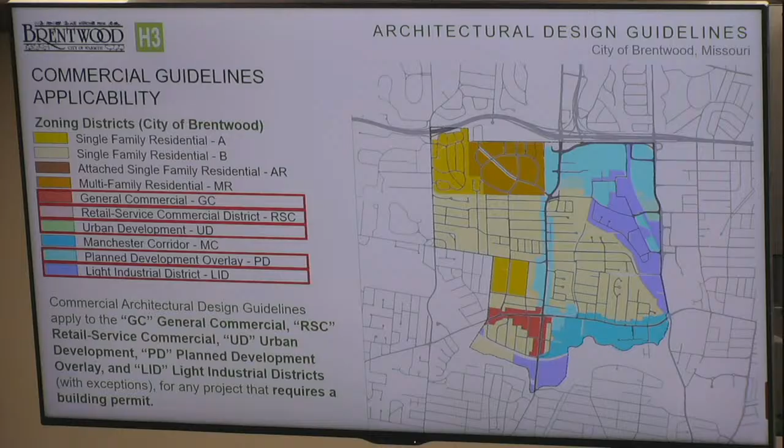One of the things, in addition to the guidelines themselves, the document that's up for adoption as an addendum to the comp plan does include recommendations for updates to Brentwood's zoning code in the commercial districts. Of course, those zoning code updates would not go into effect with adoption of this as an amendment to the comp plan, but one of the major objectives of the zoning code updates is to address some issues related to building siting and parking requirements, particularly on small lots and particularly along Brentwood Boulevard.

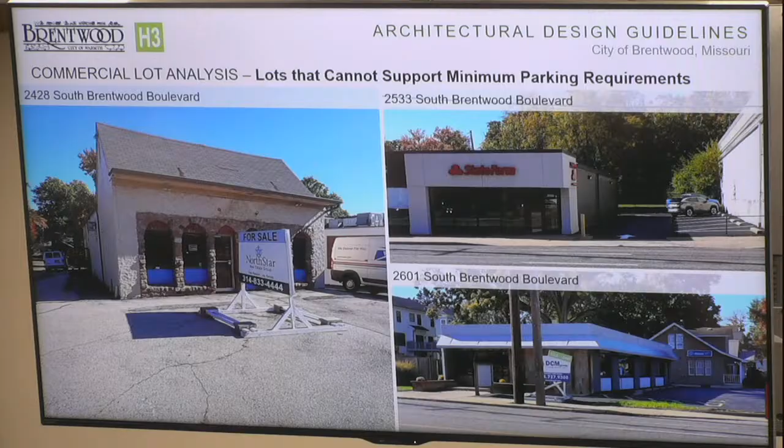These are three examples of properties that have largely been rendered unimprovable because of the requirements to comply with the zoning code's current parking requirements. And so we have made recommendations to help overcome that issue, which I'll get to in a moment.

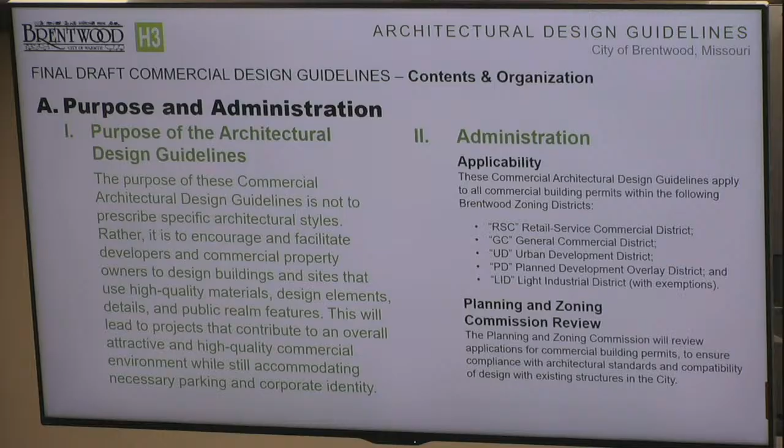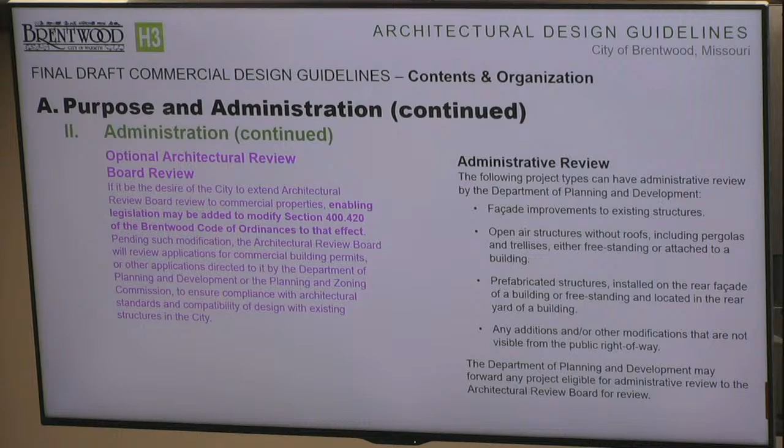So contents and organization: we start off with purpose and administration. Again, this explains the applicability, the Planning and Zoning Commission review. We have added language for optional architectural review board review, should the city wish to put commercial developments into the purview of the ARB, and then also conditions for administrative review that are similar to what you all adopted as part of the residential design guidelines last year.

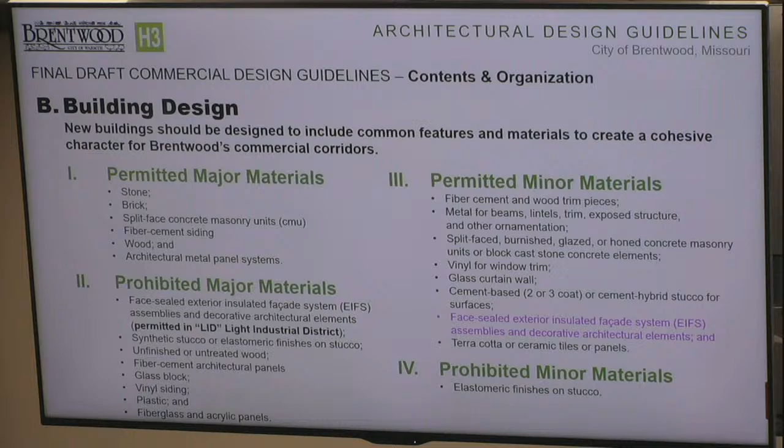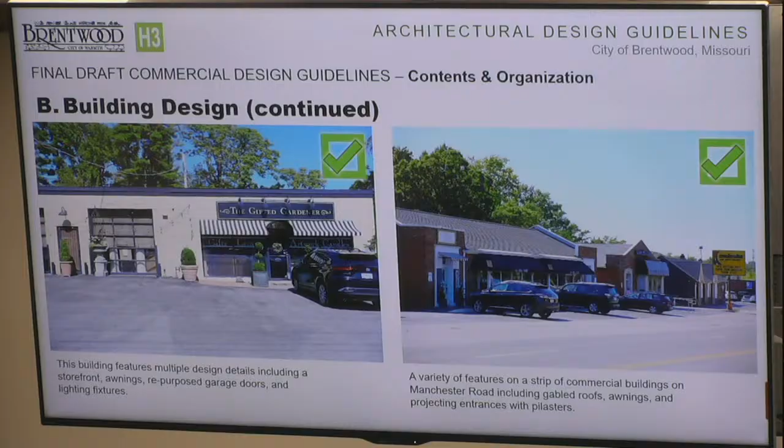Then the design guidelines go through a variety of topics related to building design. That includes materials. I will point out one change that was made based on feedback from this board: moving face-sealed exterior insulated facade system assemblies from prohibited major materials to permitted minor materials, so you see that highlighted there in magenta. Then sections on building details, design features and structures, building entrances, with some examples of good practices in Brentwood today of incorporating those features. Facade articulation, building roofline, again, some examples of those.

Bicycle and pedestrian access guidelines for windows and doors.

The doors section is another section that was updated based on feedback from our public open house. It basically states that while retail storefronts are required to have clear glass doors, other commercial storefronts including offices, service businesses, and eating and dining establishments can also use solid doors of wood or metal of a design that's complementary to the building and approved by the Planning and Zoning Commission. So this allows for some additional flexibility in non-retail storefronts.

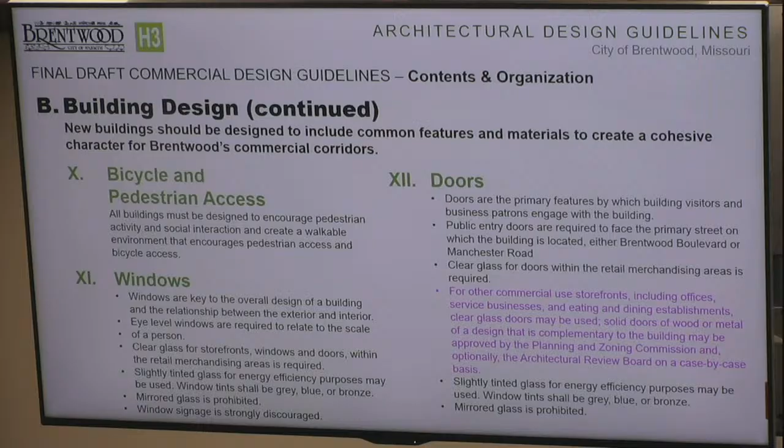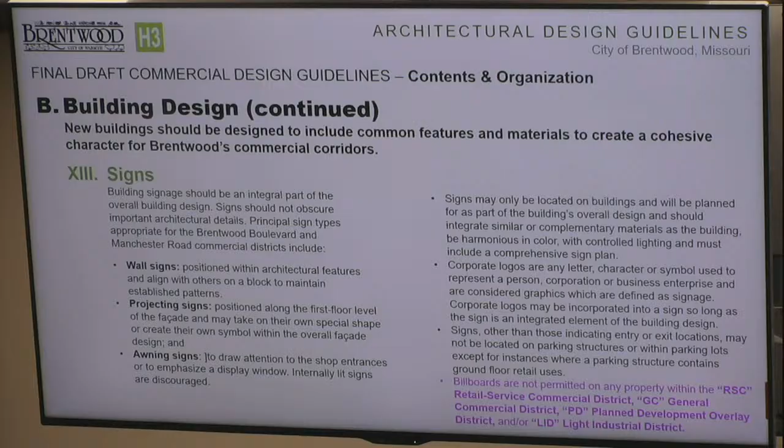Then signage guidelines. One addition here, again from feedback we received at the public open house, was to prohibit billboards within the RSC, GC, PD, and LID districts. This basically brings those districts in conformance with the prohibition of billboards in the Manchester Corridor MC district. Again, some examples of good signage and how it can be integrated into building design.

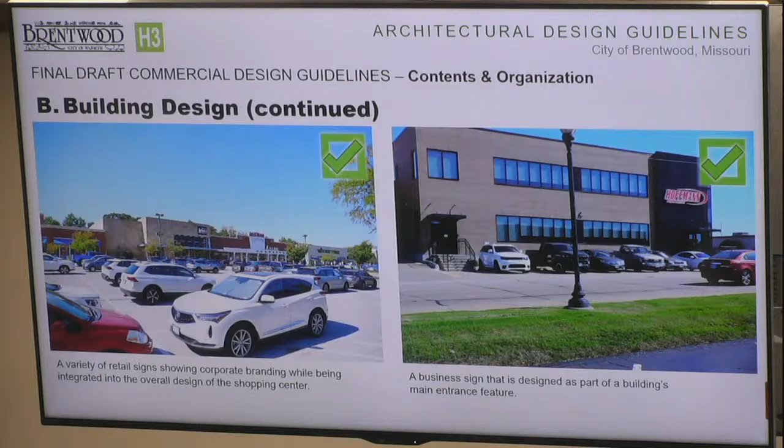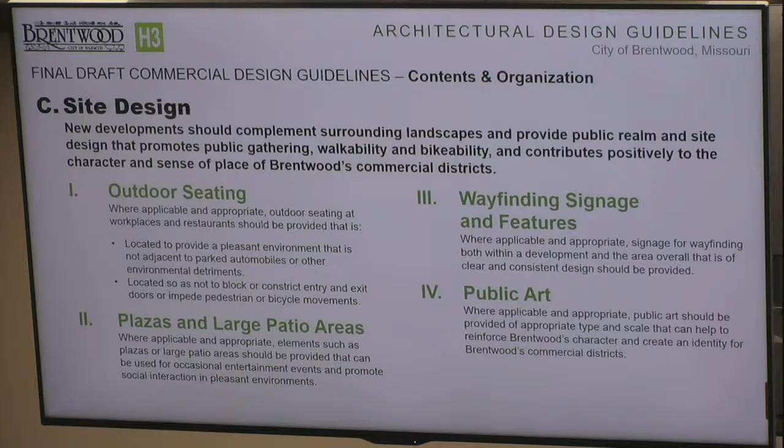Then the third section, Section C, deals with site design. So guidelines for outdoor seating, provision of plazas and large patio areas, wayfinding signage and features, and public art. And some examples of site design.

Again, although we've talked about this in the past, I'll draw your attention to the image on the right, which is storefronts along Clayton Road in Clayton. That is, from back of sidewalk to front of facade, a 20-foot setback. So keep that in mind when we get to the zoning update recommendations.

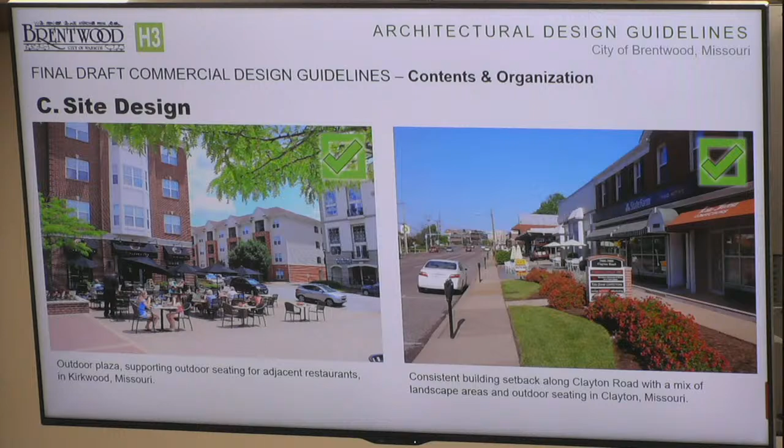Then continuing on with site design, recommendations for building placement. Again, this section was updated. There was language removed from the third bullet point to basically allow for some additional flexibility. It now states that buildings on corner lots should include a prominent architectural feature or emphasis at the corner. Previously it stated a greater height than the rest of the roof, but that was felt to be too restrictive in terms of prescribing design solutions, so that was removed.

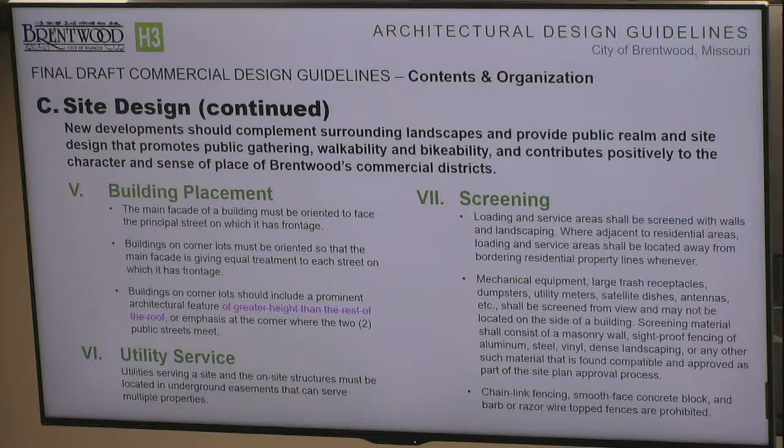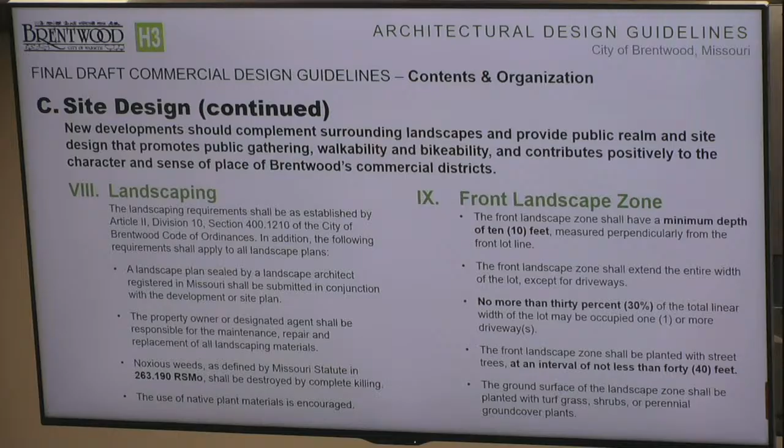And then guidelines on landscaping, which the full guidelines include permitted tree species based on what is in other portions of the city's code of ordinances, requirements for a front landscape zone. Here you can see examples of, on the left, really no front landscaping to speak of, versus on the right, a front landscape zone on a new project.

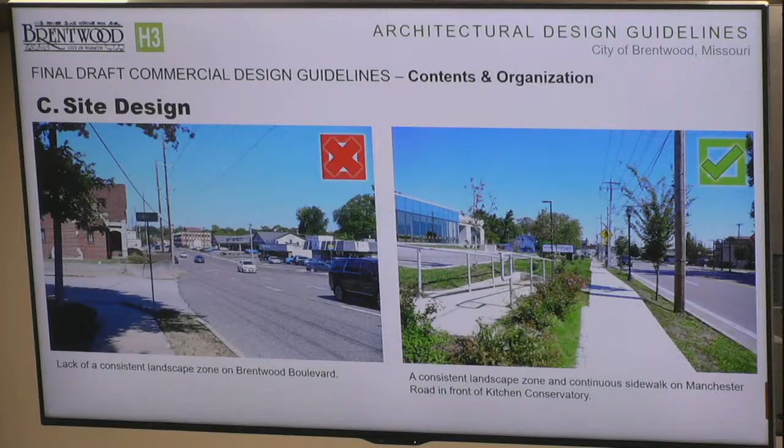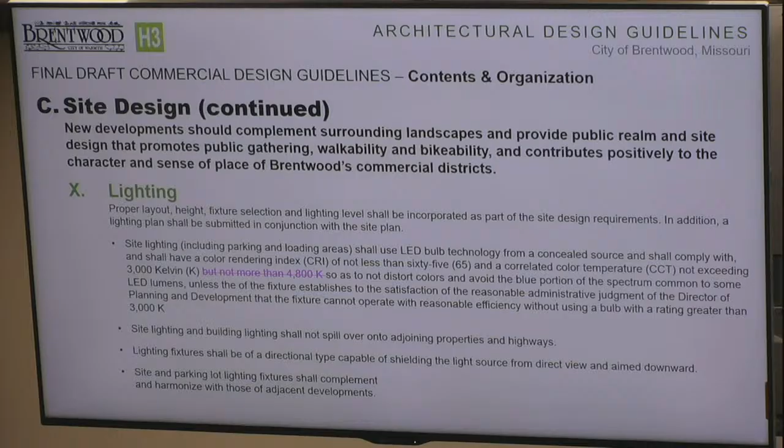And then finally, lighting. This section was also revised. There was some sort of contradictory, confusing language about required color temperature for LED bulbs on site lighting, so that was removed. They are now basically limited to 3,000 degrees Kelvin. It's really kind of unclear why that 4,800 was put in there, because it was very contradictory, but that was removed to make it more clear.

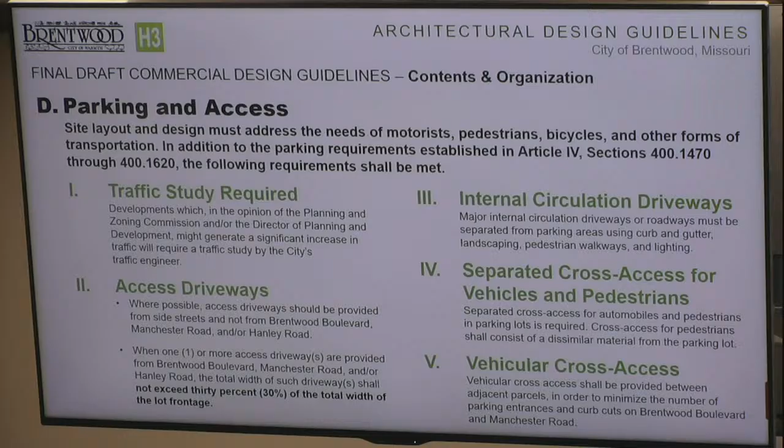And then finally, the final section, Section D, dealing with parking and access. This talks about requirements for traffic study. It looks at guidelines to minimize access driveways as they interrupt the sidewalk on the building frontage, guidelines for internal circulation driveways, separated cross-access for vehicles and pedestrians, vehicular cross-access between parcels, pedestrian cross-access between parcels, and internal circulation driveways for loading and service.

Finally, a quick summary of the recommended zoning code amendments. The main principle behind this, and we actually provide two approaches to achieve this, is to standardize the front, side, and rear setback requirements across all of the commercial zoning districts. We are recommending that as part of future zoning code amendments, that for lots with frontages on Brentwood Boulevard and Hanley Road...

...the minimum front yard setback would be replaced with a front yard build-to line of 20 feet. On Manchester Road, the existing minimum front setback would be replaced with a front yard build-to line of either 20 feet or 50 feet, and parking could be located in between the front of the building and Manchester Road for those 50-foot front setbacks.

Further, when that 50-foot front setback is utilized on Manchester Road, there would be a requirement to have a pedestrian sidewalk with a minimum width of 8 feet located directly in front of the build-to line. So essentially you would have a secondary pedestrian zone right in front of the building to promote cross pedestrian access between parcels, and then an amendment of the side and rear yard minimum setbacks to 12 feet.

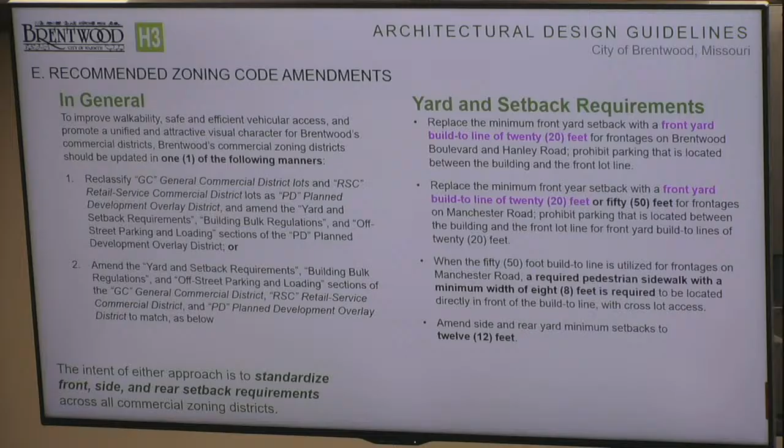We've gone through a variety of iterations of different lot sizes, but this is one typical lot size configuration showing how those recommended updates would impact the buildable area of the site. In effect, by reducing that front setback, you are providing a greater buildable area, which will help to make some of those smaller parcels easier to redevelop or improve.

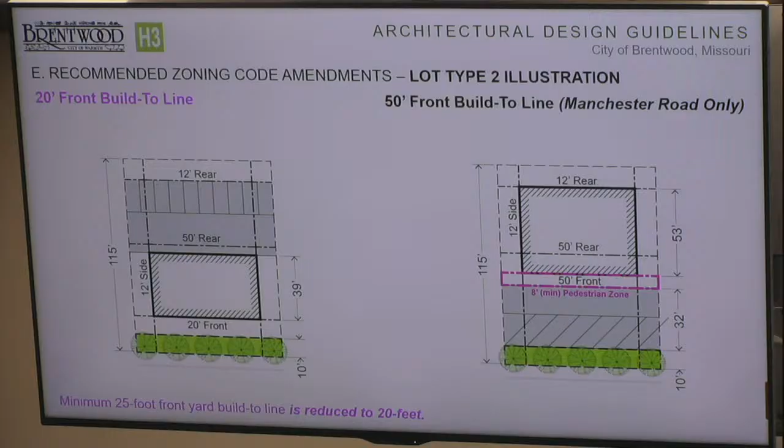Additional recommended zoning code amendments include updating the building bulk requirements to a maximum height of 2.5 stories with a minimum 12-foot rear yard setback.

If that rear yard setback is increased to 50 feet, the maximum building height could be increased to 4 stories. On larger lots, if the minimum rear yard setback was increased to 100 feet, the maximum building height would increase to 6 stories.

We're also making a recommendation that minimum parking requirements could be waived for all lots with a depth of less than 165 feet, subject to a parking and access study and parking plan approved by the Planning and Zoning Commission.

Finally, last time we talked about a potential recommendation of amending the light industrial district to include all of the permitted uses in the MR, RSC, and GC commercial districts, as well as motels and hotels.

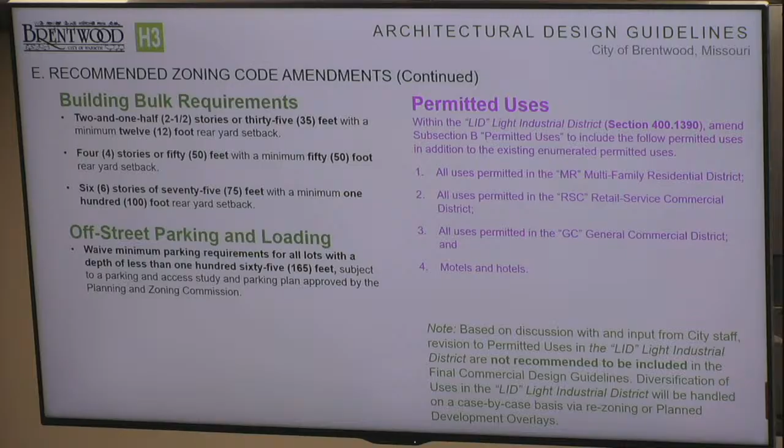Upon further discussion and input from city staff, we are no longer recommending that be included as a zoning code update. Instead, diversification of uses within the light industrial district moving forward would be handled on a case-by-case basis via rezoning or implementation of the planned development overlay.

That concludes my presentation, and I'll be happy to answer any questions you may have. Thank you, Mr. Brand. Any questions from members of the commission?

Appreciate the presentation and especially the clarifications on what's been changed. This is a public hearing as well. Are there any members of the public who wish to address the commission on this item? There have also been other public hearings, but since it is a public meeting, I thought we would make that opportunity available. Seeing none.

Next item of business, I believe, would be a motion to approve this. This would be a resolution from the commission, and that's something we don't do very often, I guess, having a resolution from us. Is there a motion for the resolution?

Just to clarify, we do have people who join via Zoom, so I don't know if we asked if anyone on Zoom wished to discuss or comment on this item. Thank you, Ms. Kelly. Does anyone joining the meeting virtually wish to address the commission on the commercial design plan, or guidelines, excuse me?

Hearing none. All right, is there a motion on the floor?

Mr. Chair, there's a 2-page resolution in the documents. Typically the staff report says there's a motion. Is the resolution motion to adopt as written? I believe that could be the motion, Ms. Moore. I would be happy to put forward the resolution as noted in the attachments.

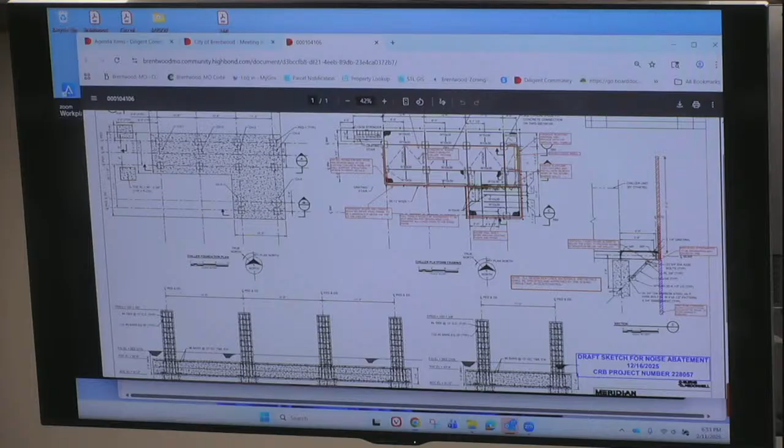So regarding material, the light industrial district does indicate the use of metal. However, given this unique situation, it does say that you can have rooftop equipment used as a sound barrier, and this is essentially creating that sound barrier. We feel that the use of the material is consistent with the design requirements of the zoning district.

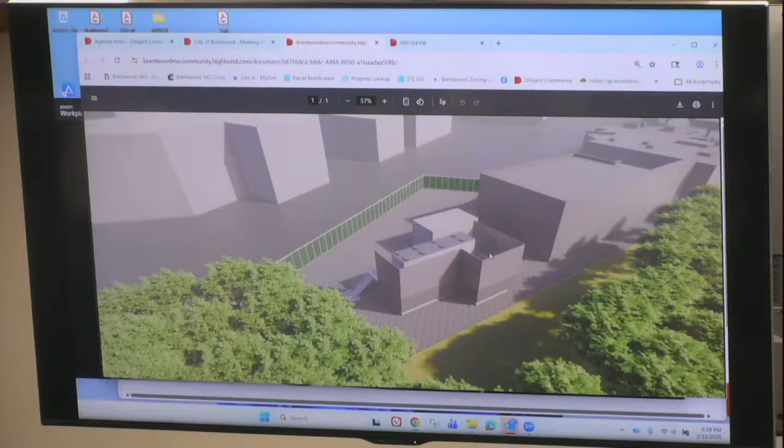So it will be very tight in with the existing chiller. You can see that here, this is the rendering. The goal, as the applicant has indicated, is that the equipment would then buffer the sound to be less than 49 decibels to comply with the city's zoning noise abatement requirements.

Do you have any other questions? Ms. Kelly, modeling is very good, and they're getting better and better at it, but obviously we want to make sure that once this is completed, that it does what it was intended to do. Is the city or the landowner going to then test again? How will that be ensured?

Yes, we'll require that it be tested again, and we can actually amend the draft conclusion if you wish to include that, so it's tested to ensure compliance with the zoning. I think it's a requirement of city ordinances already, not to violate it. May be belt and suspenders, but I wanted to make sure that is part of it as well, since simulation helps quite a bit, but we want to make sure it is in fact compliant, since it's been a long-standing issue. Other questions from members of the commission?

Mr. Foreman, you knew I was going to ask. I'm happy for you too.

For our engineer in attendance, on the section diagram you're showing about a 7-foot tall cooling tower chiller unit, with about 3 feet 6 inches from the top of the unit to the top of the screen. Is that enough for flanking noise to get over the top? That's correct, that's the recommendation of our acoustical consultant. Okay, since it says chiller by others, I wasn't sure if the dimensions were accurate. Back to your point, I'm always suspicious when the goal is 49 and the model shows 49 - not a lot of margin for error.

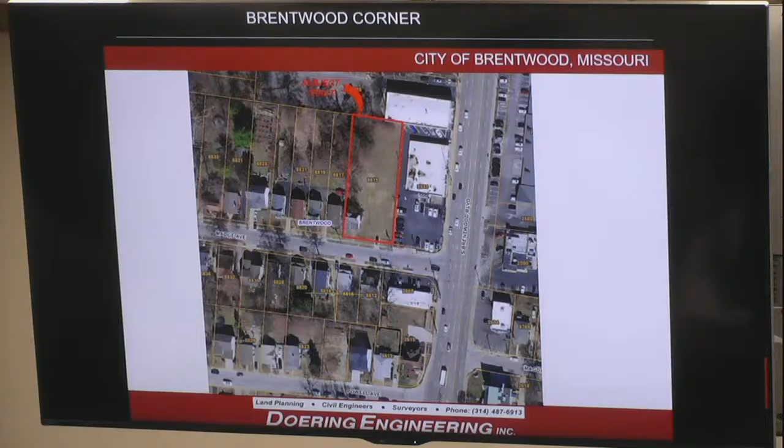Density, we're allowed 11 units by the straight density calcs. We are proposing 9 units, and I'll show you them shortly. The staff report suggests more architectural detail on the front of our building face on Madge, and we are in agreement with that, and we're happy to work with staff to work that issue out.

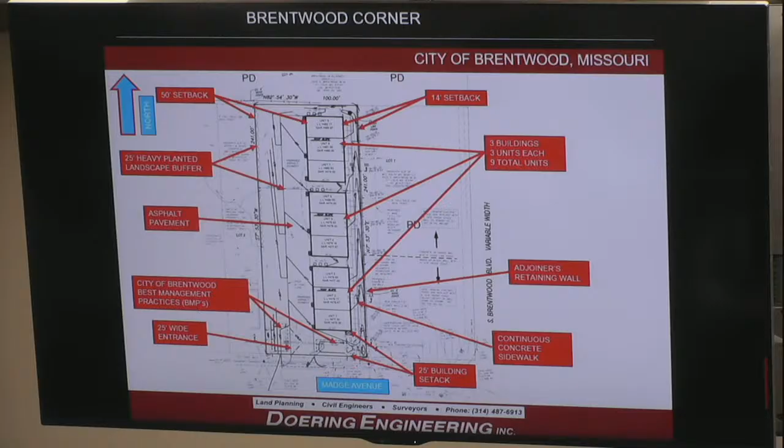Again, you have the adjoiner's retaining wall and fence at that location along the eastern property line. Mr. Doering, is that your retaining wall and fence, or is that the commercial property? That's the commercial property's. Thank you. Okay, it sits about a foot under their property. Yeah, okay, that's what I thought.

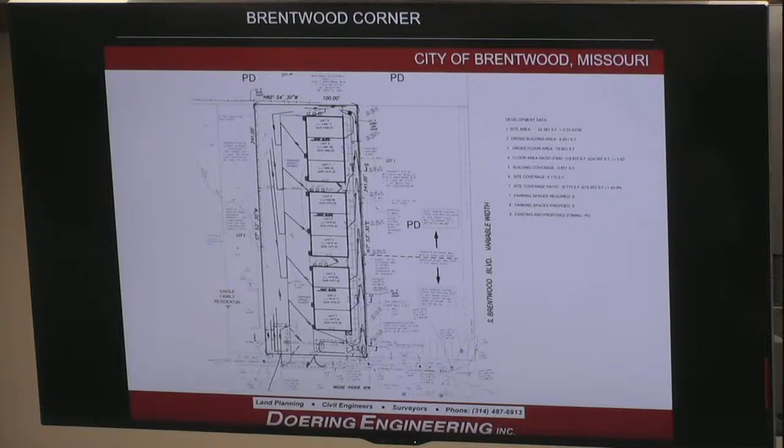So just the development data: we have 0.55 acres, and our gross building area is 6,651 square feet for all the buildings. The gross floor area of each building is 6,600 square feet, and all 3 of them will total 19,953 square feet. Our floor area ratio, as required, is equal to 0.83, and our building coverage is 6,651 square feet, which gives a site coverage ratio of 45.9%, which meets city codes.

The required parking spaces—I erred on this one, it's actually 9—and the parking spaces provided is 18. We have 2 parking spaces in the garage for each unit, a 2-car garage per unit, so 18 parking spaces total under the building itself.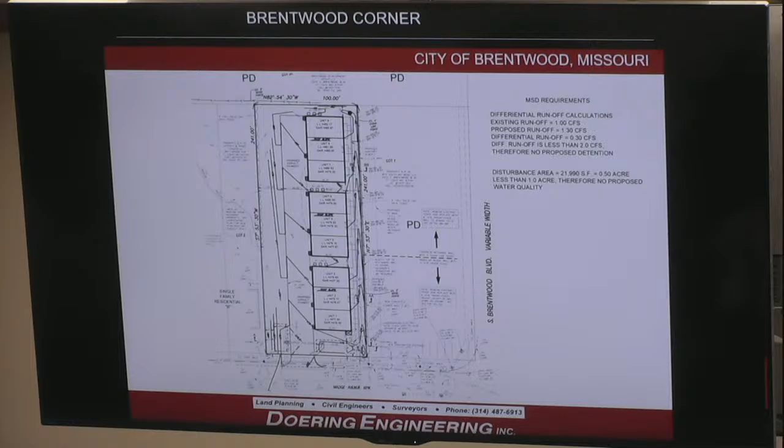MSD has BMP requirements also, however their requirements would not affect a parcel of this size. There are differential runoff calculations you have to do. If the differential storm runoff—the amount of water runoff after development compared to pre-development—is greater than 2 cubic feet of water per second, that would kick in MSD requirements for stormwater detention. However, because it's such a small amount of water, requiring such a small opening to hold it back which would clog up easily, MSD does not require any stormwater detention on this project.

MSD also has rain garden requirements, but that's based on the land disturbance of a project. If you disturb more than 1.0 acres, you're required to put in water quality features, which is a water cleansing product, on your development. This property is 0.50 acres, so MSD itself has no requirements for stormwater detention or water quality, which are the best management practices.

So even though MSD doesn't require it, the City of Brentwood does, and we are handling it—our plans have already been reviewed by the city engineer. Our underground storage, the French drains, will be located in that area. You will not see them though; there will be grass above those areas.

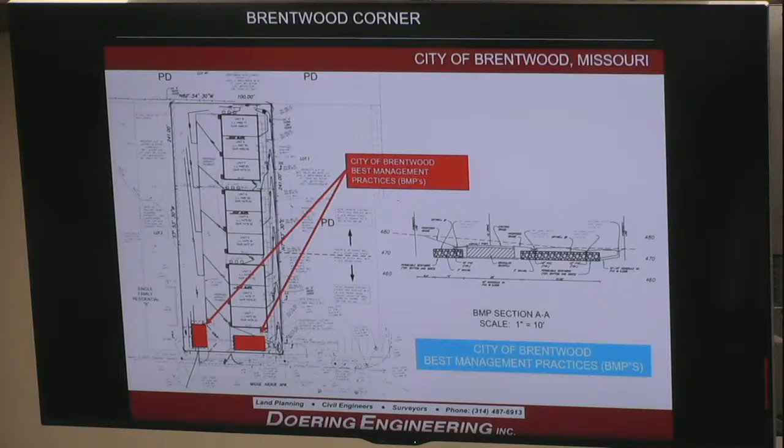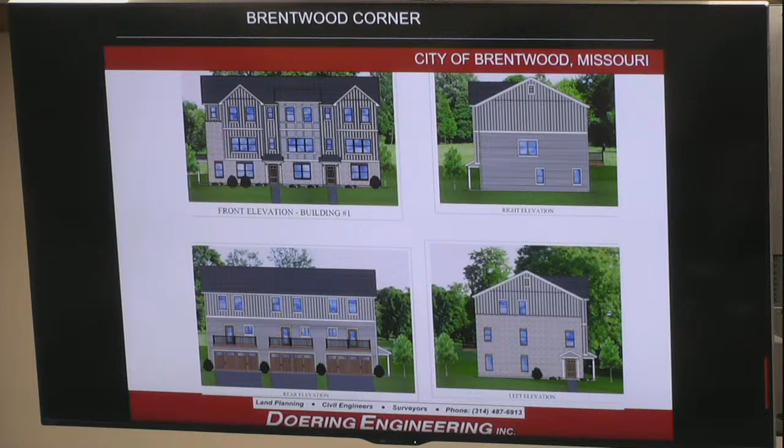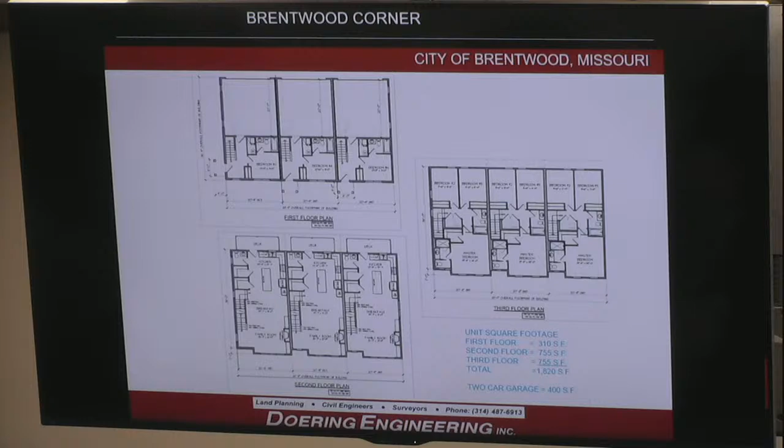The product we're going to be selling here, we anticipate will be desirable to people starting out who want to be in Brentwood, want to stay in Brentwood—just married, maybe starting a family. We don't know if they'll stay a long time, but our marketplace is those people 25 to 35 years old. With the stairs, we do not anticipate older adults being interested in our product at all, but we'll sell them a unit if they want.

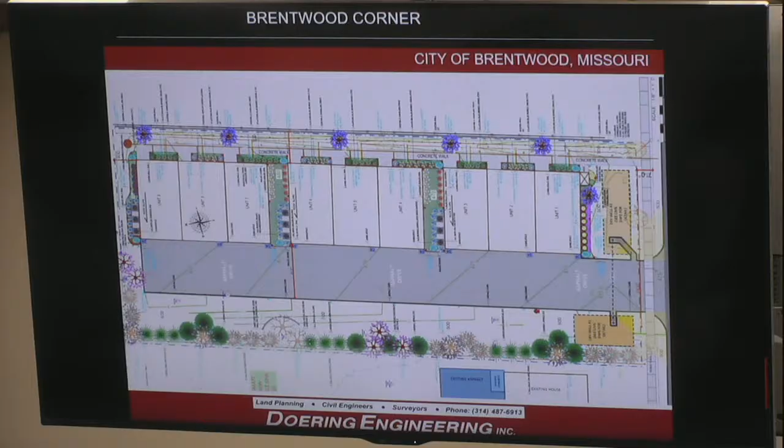Staff has reviewed this. I think they are satisfied, though I can't say 100%—is that fairly accurate, Whitney, with the landscape plan? Are we pretty close? Oh, we'll discuss that. Okay, I'll let her say that.

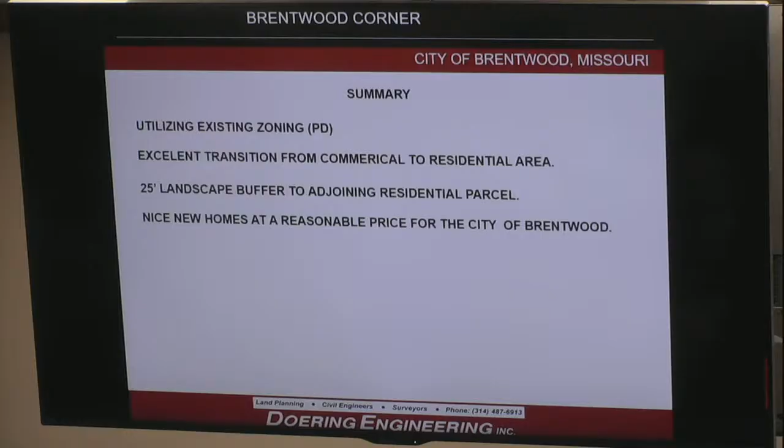In summary, we're utilizing the existing planned development zoning overlay. We believe it's an excellent transition from commercial to a residential area, with a 25 foot landscape buffer to the adjoining residential parcel. These are nice homes at a reasonable price for the city of Brentwood. We think it's good that people who grew up in Brentwood have a chance to stay here. It's an excellent proposal and we think it'll be a good addition to the city. We appreciate your consideration of this project and would be happy to answer any questions you may have. Thank you so much.

Thank you, Mr. Doering and Mr. Lamachane. We're going to go to the staff report, and then we'll have some questions for you most likely. Ms. Kelly, staff report. Yeah, before we start the staff report, they do have material samples if you would like to pass those out. That would be great.

So we've got a shingle section and we've got bricks. The vinyl section that's blown up is green, but we're not using green—we're actually using the gray one, which is a smaller piece there. So just on the siding, it's a gray siding.

Ms. Kelly, go ahead. Oh yes, take it away, we'll multitask here a little bit. Okay, thank you. As the applicants have indicated, they are seeking approval of a development of 9 townhomes with 3 units within 3 buildings.